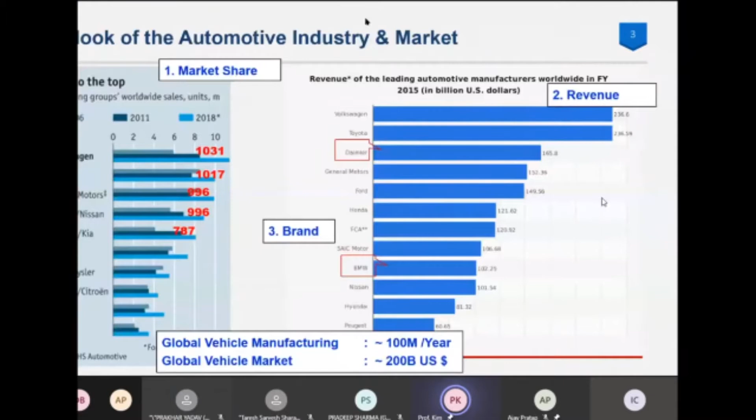This car, we can see, represents another category of the automotive industry: brand. Why are these three different categories important? Currently, market share and revenue are very important in the current automotive industry. But in the future, if the market moves in another direction, there may be a big revolutionary change. We expect a big revolutionary change in the automotive industry and market.

I'll talk about this again later - the mega trend. I'll revisit this issue, and there are 5 mega trends in the automotive industry, showing the digital transformation of the industry. The first trend is electrified, and it's becoming autonomous, shared, connected, and also the system is yearly updated. Electrified means there is a revolutionary change in the energy system - from fuel to energy, most vehicles are now powered by electricity.

Electric vehicle will be the main trend. And autonomous means AI will be a key role. Then self-driving intelligent vehicles will be the future.

And shared means there will be a big change in ownership and mobility. Instead of purchasing a private vehicle and holding ownership, which is the current model, in the future, mobility as a service will be the major business in the automotive industry.

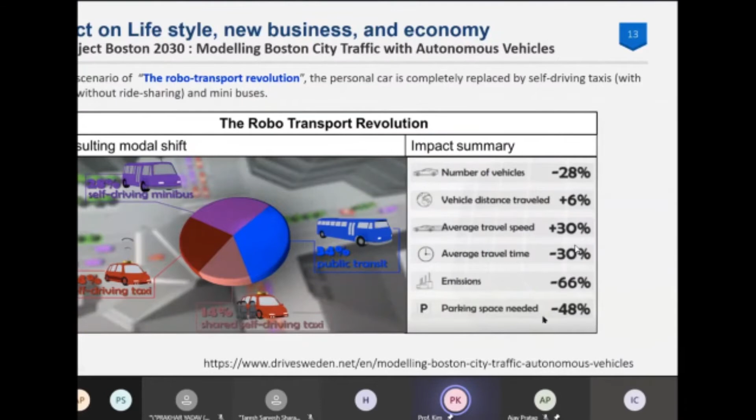Then I'd like to introduce the key AV technologies developed by the Yonsei Seamless Transportation Lab. I'd like to introduce five technologies that have been developed or are under development by the lab.

One is end-to-end steering control, the second is localization and mapping technology, the third is driving comfort of autonomous vehicles, the fourth is in-cabin monitoring, and the last is dynamic driving tasks and irregular situations.

It adapts differential GPS, LiDAR, and camera, using a LabVIEW system for the controller, and we use a PC, tracking a pre-planned path. This was a very early stage of autonomous vehicle development.

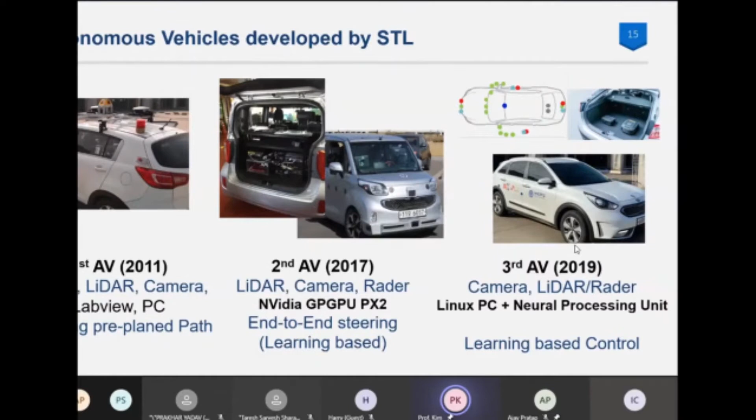In 2019, we got the license and developed the third autonomous vehicle using camera, LiDAR, and radar, replacing the NVIDIA Drive PX2 with a Linux PC and adapting a neural processing unit. We are developing a learning-based control system and a localization and mapping system for lateral and longitudinal controls.

I'd like to introduce end-to-end steering control, which is a deep neural network-based autonomous vehicle control system. The aim is to develop human-like driving.

Humans learn to drive and adapt to changing environments and situations, though sometimes we make mistakes. Usually there is a basic self-driving loop: sensing and perception, then a decision loop, then a control loop. We call it the self-driving loop, where based on perception there is decision and control, looping like this.

But actually human driving is a little bit different from this. With your eyes you can see, and we never calculate the curvature of each lane or path. We just learn—we become experienced, so at this speed, in this curvature, we know how the driver can control the steering. This is learning based.

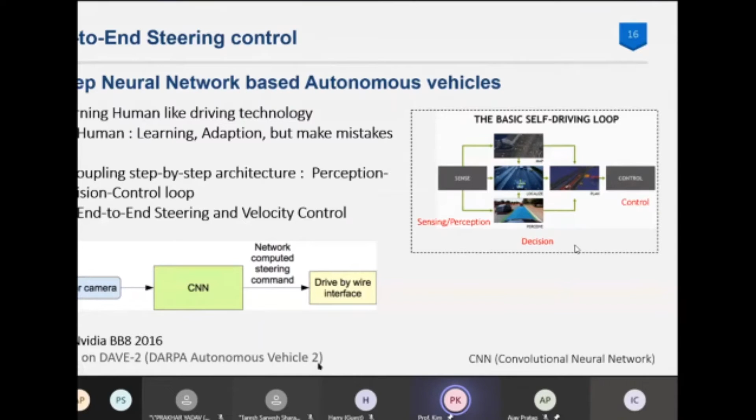The first autonomous vehicle adopted the DAVE architecture: there is a front camera, then a text image, then the DAVE neural network. We slightly modified DAVE and named it DAVE-2SKY, with actual control through a drive-by-wire system.

The basic architecture is very simple: camera, then the neural network, and then direct control through the CAN network of the vehicle.

For training this kind of system, in the pre-training phase we apply supervised learning using simulation. PreScan is a very well-known vehicle simulator, and we record steering angles and match them to the video input.

The camera records the image, and we record the steering angles. We train the DAVE2 network in this supervised way—there is an error that is back-propagated to the DAVE2 deep neural network.

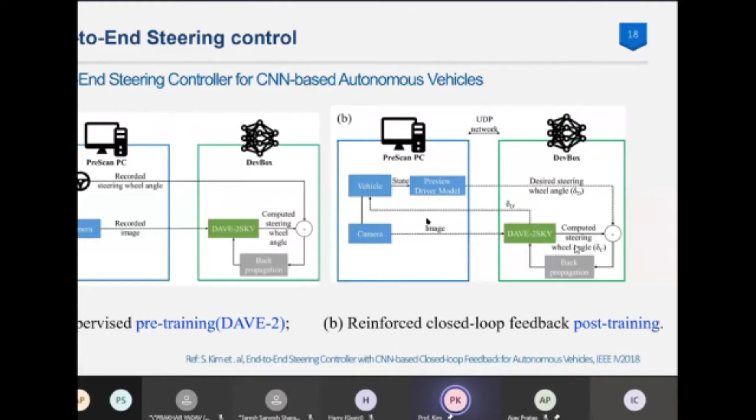There is the desired steering angle from the driver preview model, and back-propagation for training the drive network. There's also feedback to the vehicle, changing the vehicle state and training the driver's preview model.

Let's look at the simulation environment and test environment. The details of the experimental results will be shown by Dr. Mishra after this lecture.

Here is the simulation environment. During training, the vehicle moves counterclockwise, but in the test drive, the vehicle moves in the opposite direction. That's why, using the same route, we can still provide a different environment for the vehicle during training versus during testing.

Let's look at the result. This is the pre-training only result using DAVE, and this is DAVE-2SKY with our reinforced second training. Facing a very steep curve, the pre-training version departs the lane, but DAVE-2SKY still keeps the lane very well.

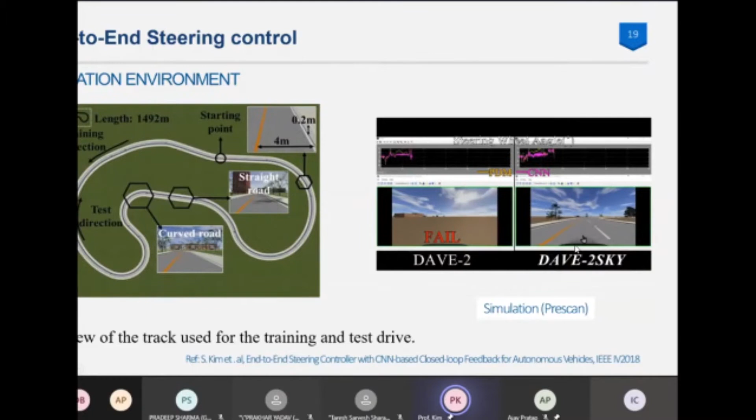Let's look at the difference in the steering angle. The green line is pre-training only, and the red line is ground truth from the expert human driver.

The blue line is with post-training applied. The post-training follows the ground truth very well through the curves. With only pre-training, the vehicle departs the lane, but with post-training, the vehicle still follows the ground truth very well. This shows the error between ground truth and post-training—at this point you can find the error is bigger.

Then the vehicle departs the lane in the previous case, where only pre-training is applied.

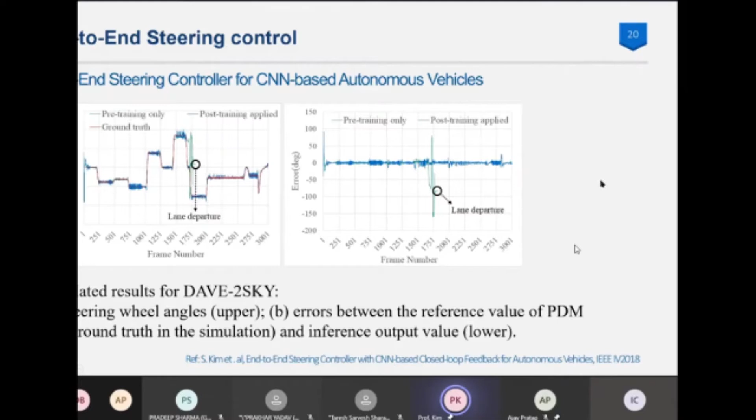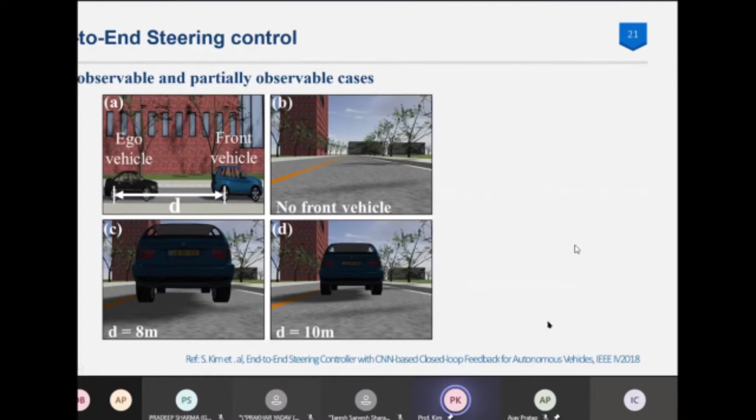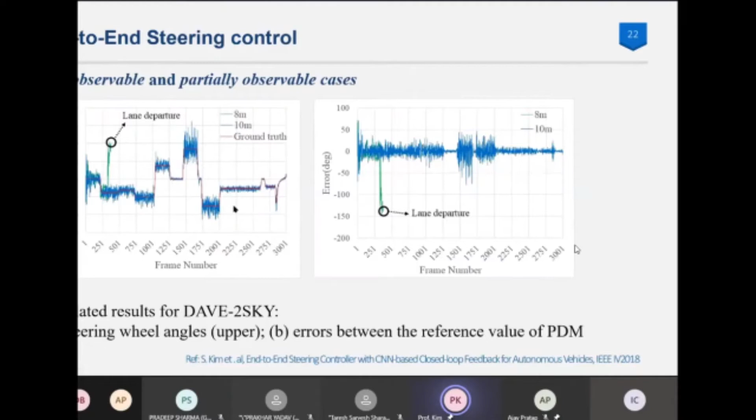This shows the simulation result for 8 meters versus 10 meter distance, compared to ground truth. At only 8 meters distance, the lane departs from ground truth after about 300 to 400 frames. But for the 10 meter difference, it can follow the ground truth steering control values. This means even when some part of the lane information is invisible due to obstruction by the front vehicle, if there's a margin of 10 meters distance, this kind of end-to-end steering control can work properly for autonomous vehicle steering control.

Let's look at the second issue: dynamic localization using vision and map matching. Our concept is for human-like navigation for autonomous vehicles. When you want to go to your destination, currently you press or call your destination point, then from the starting point there will be planning of a route, and the navigator guides you on how to arrive at your destination. Our approach is very similar to this.

Our approach enables autonomous vehicles to dynamically localize their position without very accurate DGPS. Instead of DGPS, we use visual map matching, like a human driver - we only see the environment with our eyes, then we know where we are, the vehicle's position and heading. We call this visual map matching, and then we can control by end-to-end control. So we have end-to-end control, and the second thing for human-like autonomous driving is we need visual map matching.

For this purpose we develop this kind of network for tracking position and heading angle on high definition maps. This is the map - the red dot is the current position on the map, and the angle is the heading of the vehicle. This is the camera, and from the camera input we extract lane recognition and segmentation using a CNN network. One part is for visual understanding, the other is for matching the visual information to the map. This allows us to accurately position the vehicle's current position and heading angle.

This is for the multi-lane case, for real-time tracking. This red one is the position by GPS. GPS has about 10 to 15 meters of error - that's why GPS only guides the rough location of the vehicle, with about 15 meter error. Based on that, we roughly estimate the position of the vehicle, and then through visual map matching, we adjust the location and heading angle.

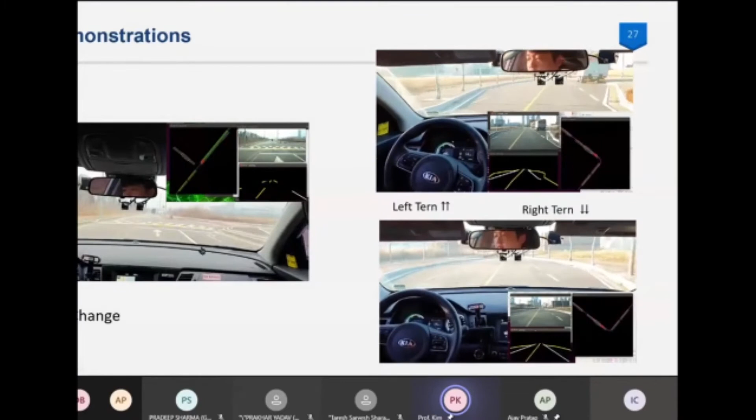The next issue is driving comfort of the autonomous vehicle. I hope you have some basic knowledge of lateral and longitudinal acceleration.

The x-axis is for lateral acceleration, and this is for longitudinal acceleration. Longitudinal acceleration is what happens when you drive the vehicle and it's accelerating or braking. Plus longitudinal acceleration means acceleration, and minus acceleration means...

braking. For a younger, aggressive driver enjoying aggressive driving, it's for quick acceleration and enjoying sudden stops. Therefore younger guys usually like sports cars, preferring a big plus longitudinal acceleration and minus longitudinal acceleration.

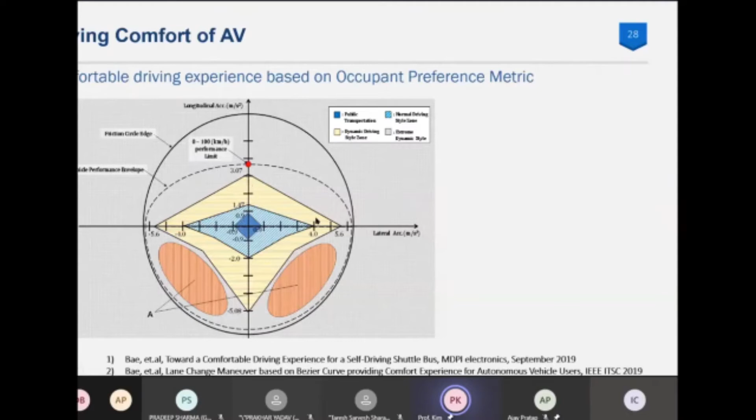The passenger in the vehicle is only an occupant. But when he or she is driving their vehicle, they have a preference metric. You can mark the preference metric in some area of this matrix.

Based on the occupant preference metric, the occupant selects a preference metric. Based on the preference selected, we can optimize the motion planning and control, the lateral and longitudinal control, based on the criterion of lateral and longitudinal acceleration.

Then we get the vehicle status from the sensor. Based on this criterion, we control the motions. Like this is a kind of autonomous vehicle route.

This is the preference metric. Here is an experiment on real road test. We are making this kind of real road test.

This trajectory has steep corners. We make a right turn at each corner. Then we are selecting the occupant preference metric like this criterion.

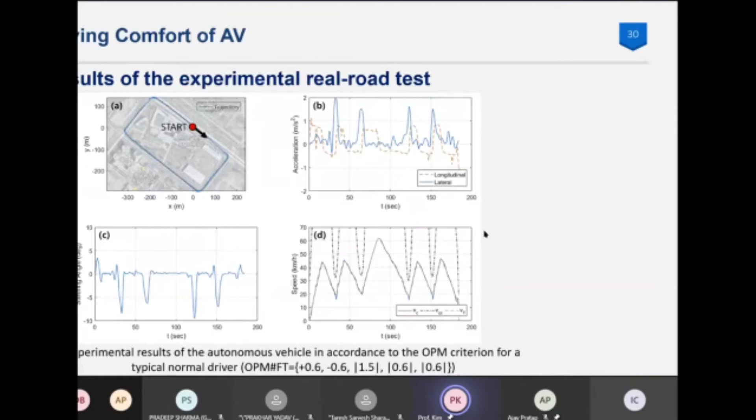The next topic is the dynamic driving task. What is a dynamic driving task? When the driver is driving the vehicle, the driver is actually...

detecting the object and event and responding. During driving, we call this the OEDR task - object and event detection and response. This OEDR process is called the dynamic driving task.

For doing this OEDR, if there is a pedestrian on the street, the driver must detect this pedestrian, and then decide whether to stop or bypass the pedestrian. This is the response of the driver.

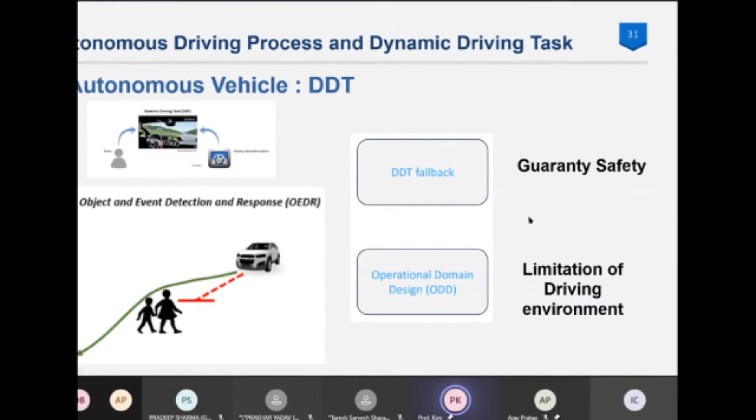But this is for normal situations. If the operating domain exceeds some limit of the driver's capability, we must do the fallback system for guaranteeing safety. Then let's look at more details of the dynamic driving task and the self-driving process.

In the driving task, we can classify the task into three functions: strategic function, tactical function, and operational function. The strategic function is for choosing the destination, and based on the destination we are planning, for example whether we take a highway or a local way, based on the toll fee or expected traffic jam. We choose the path for arriving at the destination.

This is for the strategic function. During the driving, we are sensing the environment and doing the OEDR, which is object and event detection and response. I explained this in the previous slide.

Then there is the operational domain, which we call the ODD. The ODD means the environment each driver can drive in. For example, most of you are Indian, and India has very warm weather. Can you drive on an icy road at 100 km/h? Can you drive your vehicle in snow at 100 km/h? I think you've never experienced this kind of snowy highway condition, so maybe it's out of your operational domain, out of your domain capability. That is the concept of the ODD.

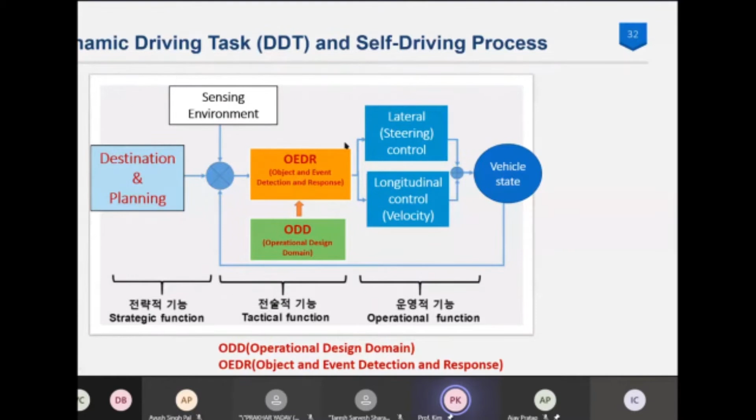Under the ODD, there is the OEDR, which is the tactical function - performing object and event detection and response. Based on the OEDR, we control lateral and longitudinal movement. As a consequence of this control, there is a change in vehicle state, and there is feedback. There is also sensing of the environment for rain, mapping, night, wind, or fog - we need to sense the environment. That is basically the dynamic driving task of the autonomous vehicle.

Then what is level 3 and level 4? It's back to the beginning of this lecture. For level 3, I told you that it's for self-driving.

Quickly back to the slide. I need to remind you of this one. Can there be something wrong with sharing? Okay, hello sir, hello sir, yeah okay okay. Now we share - okay, sharing the slide again.

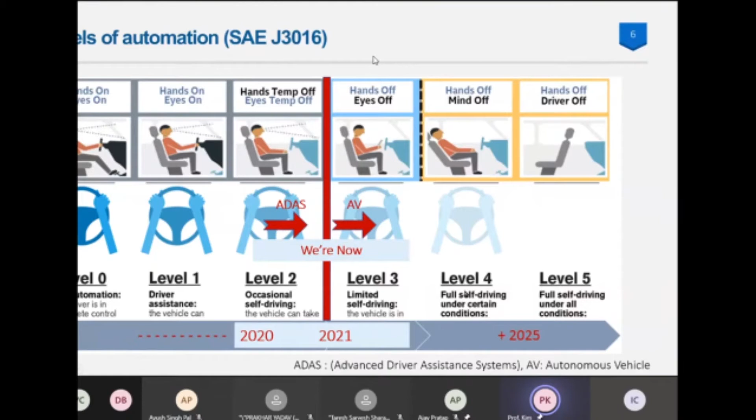Here, level 3 is a limited self-driving. It means it's self-drive, but even though it's a self-driving vehicle, there is not full self-driving - there is a limitation. Then I try to explain what is level 3, level 4, and level 5, and what is the difference. Level 3 has limited self-driving, Level 4 full self-driving only under certain conditions. Level 5 is full self-driving under all conditions. Then I'd like to explain the difference in the dynamic driving task for these vehicles.

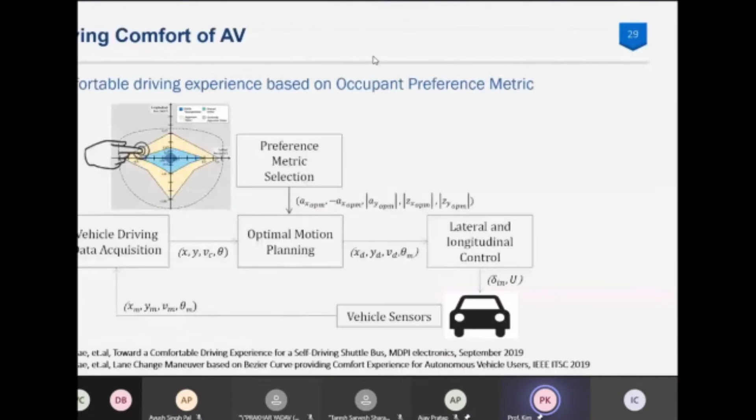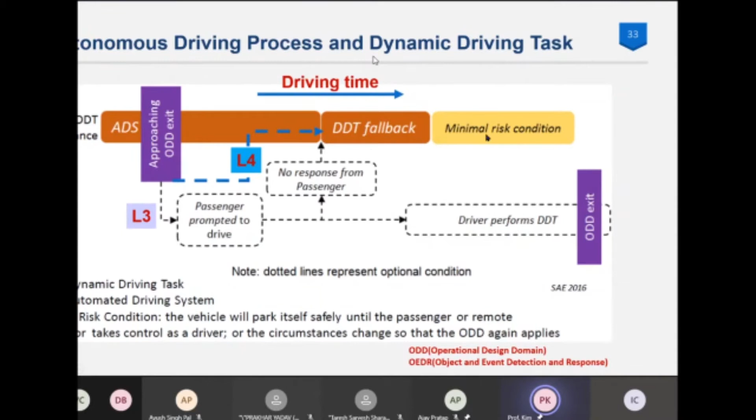For level 5 vehicles, there is no ODD exit condition - it's full self-driving, it must drive in all conditions, with no ODD exit environment. You can drive anywhere, any condition, anytime. That is the big difference between level 3 to level 5 autonomous vehicle stages. For artificial intelligence up to level 3 autonomous vehicles, you are usually very familiar with recognition and detection of the environment.

There's vision for detecting something, and for image segmentation. There's also an attention loop for understanding and predicting the environment. This kind of commodity deep neural net for artificial intelligence works for autonomous vehicles up to level 3. For vehicles above level 3, we need more intelligence.

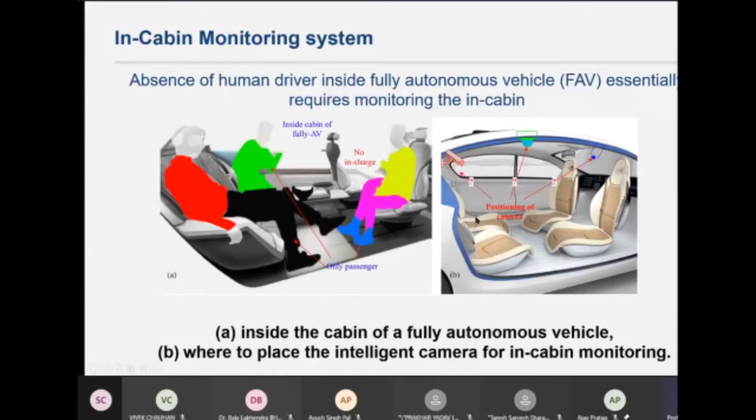The first thing is finding the proper or optimum position of the camera in this kind of fully autonomous vehicle. We might think about a front camera, but it only sees the front driver, not the back seat passengers fully. With a ceiling camera, we can capture the full inside image using a single camera.

Then we can detect objects that may cause safety issues, or other important obstacles, using detection of a knife, cigarette, luggage, or drinking. You can monitor all kinds of things with the ceiling camera.

But another important issue is privacy. If you monitor using a camera inside the cabin, the real face will be recorded, which will cause a violation of privacy issues. That's why we need technology for face anonymization.

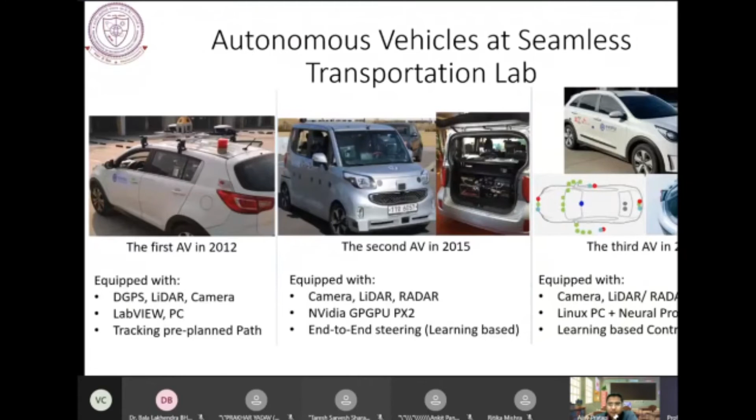In this video, as I already explained, we have 3 autonomous vehicles. This video is portraying the demonstration which was captured at one city, and the lap was around 2.4 kilometers, and the vehicle was capable of moving at 30 kilometers per hour speed. You can see here the descriptions, and the total area covered was 24 kilometers.

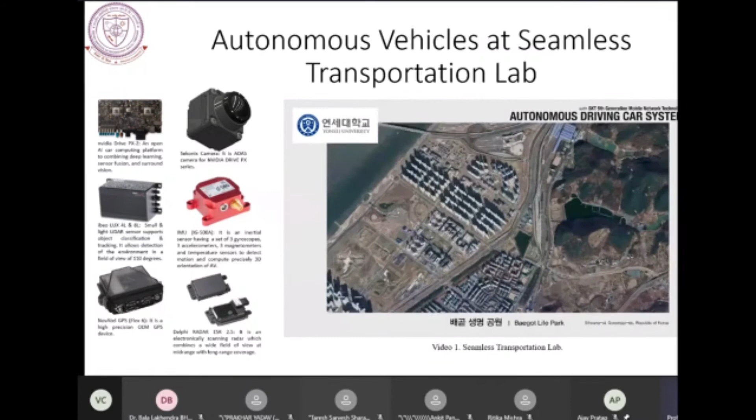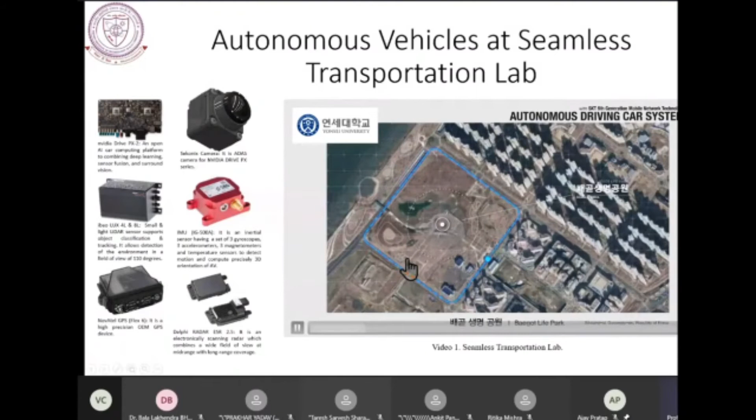So this is the lap. In your video screen you can see the lap covered, which is at Sejong city in Korea. It is around 2.4 kilometers, and total distance covered was around 24 kilometers. And this was the vehicle, which is equipped with the different sensors we have just talked about.

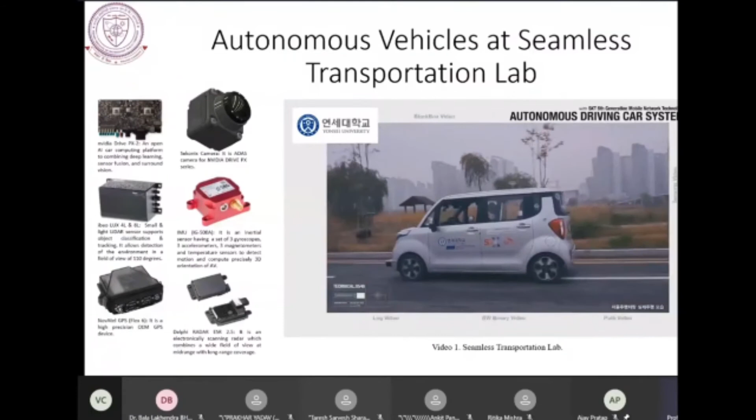So this is the real-time video captured on that same lap. This shows the video from another vehicle, and this is the main autonomous vehicle. Later we will see the black box video captured through the vehicle. This is the original video frames we are capturing. These are the logs, and here we can see one window for black and white binary video.

This is the path we are going on, because here in Korea it is the right driving track. This is the screen where we can see and sense the coming vehicles and obstacles, etc. So as we can see, we are moving, and there is one bus coming, so we can see in that video it will be detected.

You can see it stops. So here we can see the bus is there, which is captured with the bounding boxes. And this is the captured green bus and other vehicles we can see. Again there is a green box.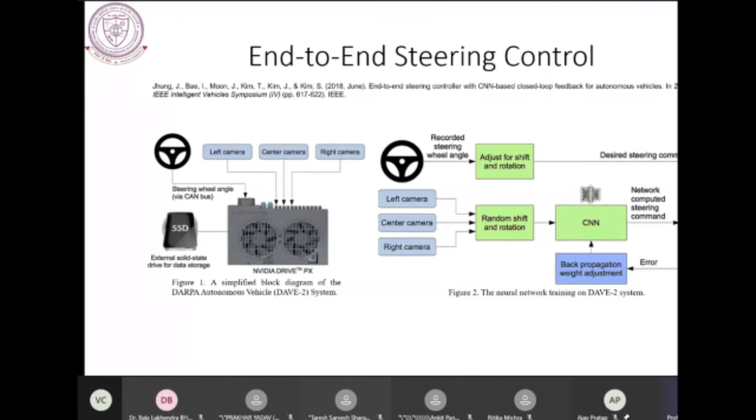And this is the basic concept of our DAVE-2 system, which was from NVIDIA, but we have proposed DAVE-2SKY with two training phases: pre-training and post-training. Post-training is the reinforced training.

The pre-training was actually from PreScan, which is a simulator that only simulates virtual scenario situations, but we have adopted the PreScan model and retrained that model with our own network.

That network was this: it has 5 convolution layers, as we can see - convolution layer 1, 2, 3, 4 and 5 - and it has 3 normalization layers, batch normalization, and then 2 fully connected flat layers. Finally at the output we are able to predict the steering wheel angle.

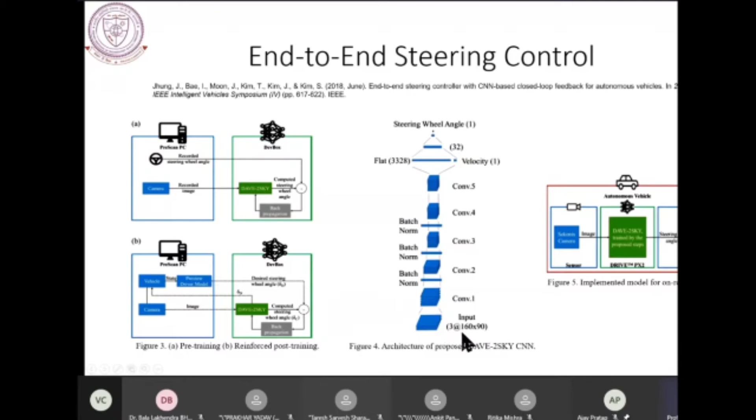So the whole system works like this: there will be the visual sensor through which we will capture the video images and real-time frames, then our DAVE-2SKY model will predict the value of the steering angle, and accordingly the vehicle can move, as we have seen in our previous demonstration. We have captured the input at a frame size of 160 by 90 in RGB.

So this is the track we have chosen for testing and training. As the professor already told you, the training direction was counterclockwise and testing was clockwise. This was just to preserve that the training and testing inputs are totally different, not the same for the model, so we can avoid any kind of overfitting or cramming situations.

And we have different scenarios chosen in our lab, like curved road and straight road kinds of scenarios, and this lab is actually at Yonsei University.

So we can see the scenario is like there will be the ego vehicle, which is the autonomous vehicle on which we have implemented this DAVE-2SKY system, and there will be some front vehicle. So there might be two scenarios: in the front there is no vehicle, as we can see in figure B.

And if there is a vehicle, what is the minimum distance through which we can estimate the exact angle? We have chosen the minimum distance at 8 meters and 10 meters, and we will see the results in future slides.

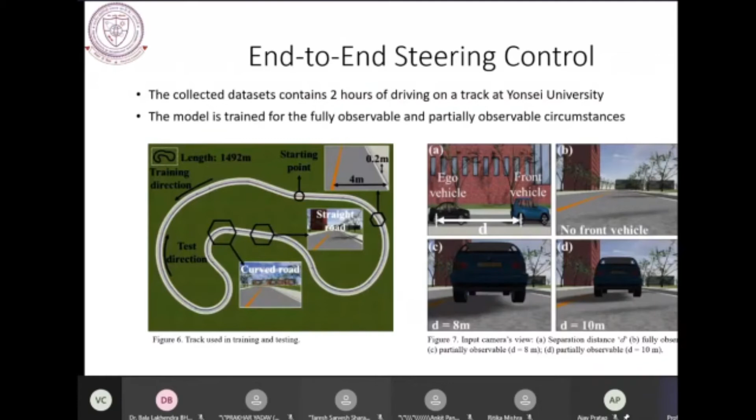So basically there are two kinds of scenarios: the fully observable scenario and the partially observable scenario. These are the experimental routes we have seen, and these are the results.

So we can see that the pre-training model, that is from the PreScan, had problems when there was a sharp turn or something - it took a lane departure if there was a sharp turn, so it was not able to predict the steering angle at sharp turns. But the post-training model crisply identified the steering wheel angle and followed the track.

So, for both fully observable and partially observable scenarios: for fully observable, pre-training and post-training were applied. The pre-trained model showed lane departure after a few frames, but the post-trained model followed the same track correctly. In the partially observable case, at 8 meters there was some lane departure, but at 10 meters we easily went through in both cases.

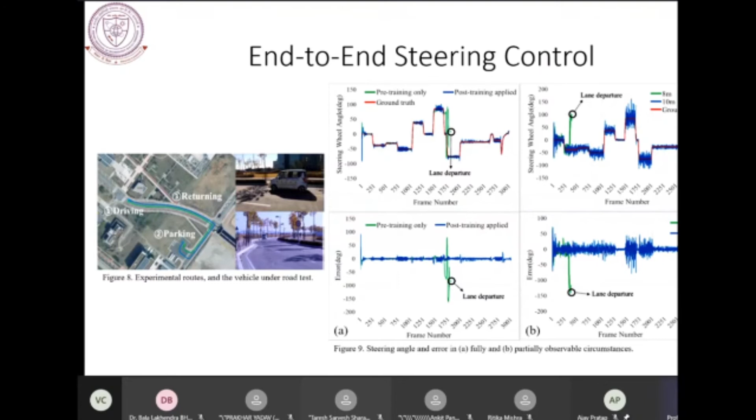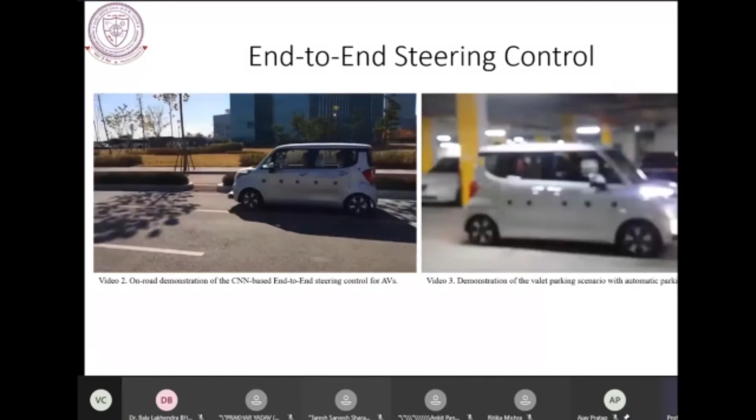In this way we developed our own end-to-end steering control, which was able to follow the exact steering wheel angle. These are the videos showing the track we followed, inside the Yonsei campus.

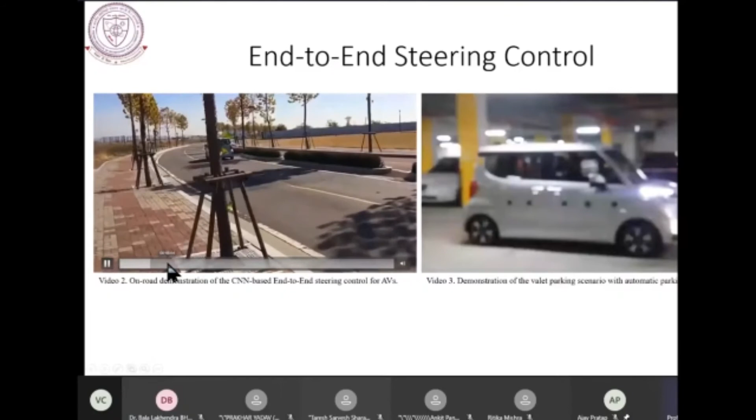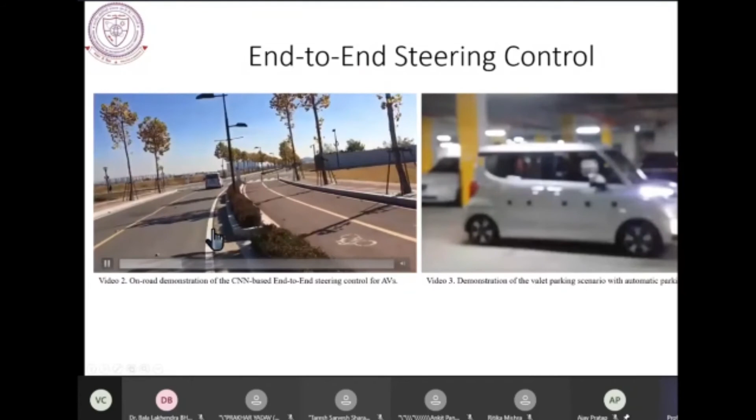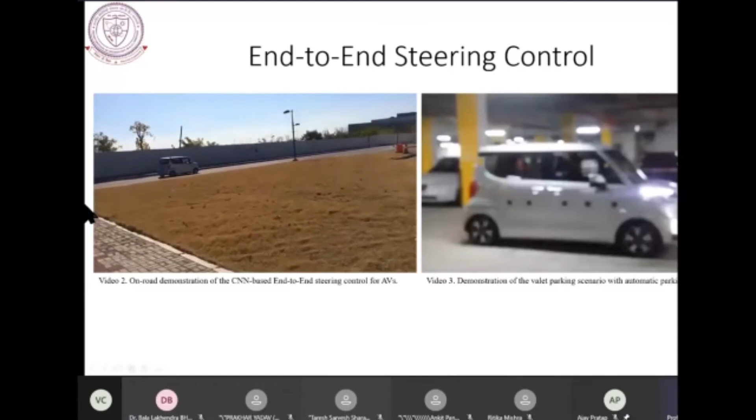See, the vehicle has good steering wheel prediction, so it turns. Now there is the parking place where the vehicle will again take the turn and safely park.

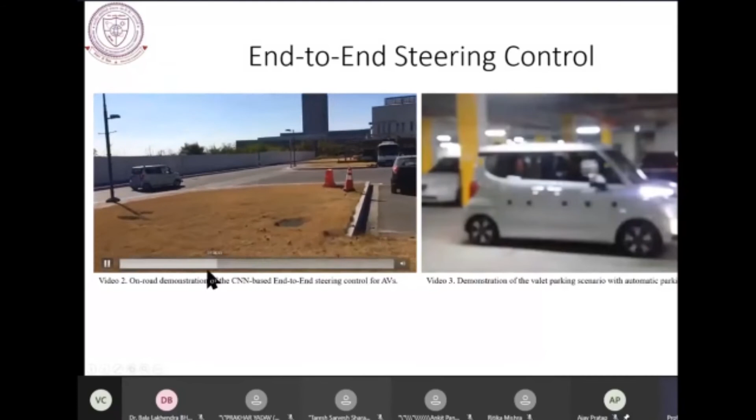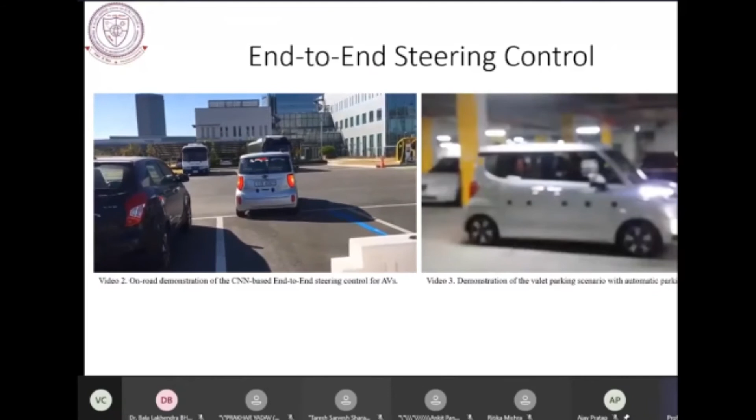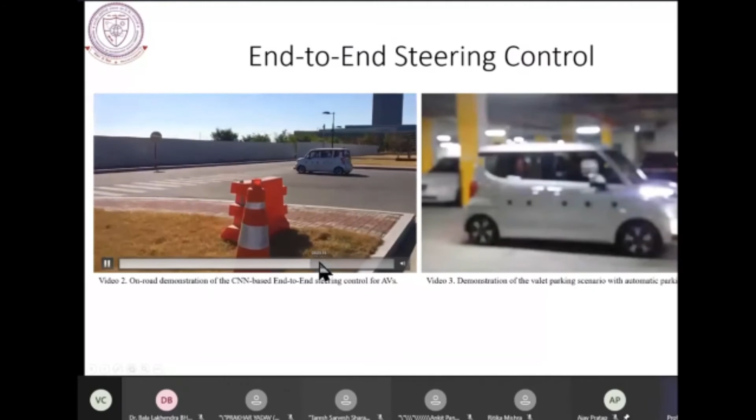This is the position of parking where the vehicle will park itself. This is the parking position, and then it will retrace the lap after a few times.

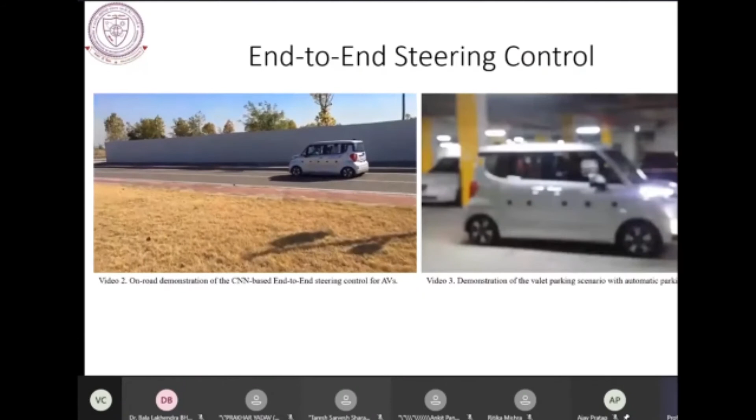Through this demonstration we have seen the vehicle was able to predict the steering control at sharp turns as well, and it was able to park itself at the desired location.

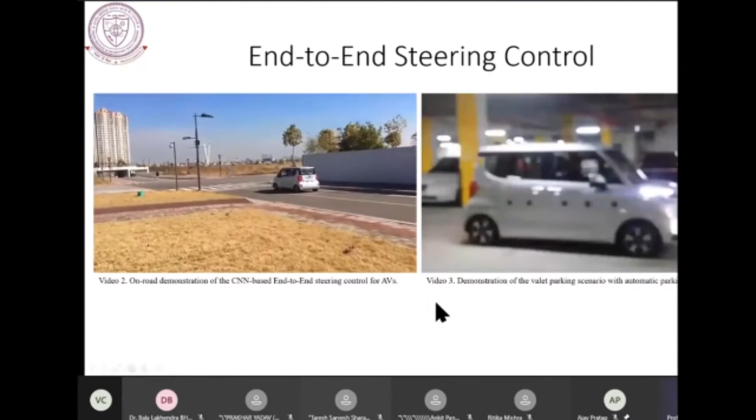Again it turns, and retraces the path.

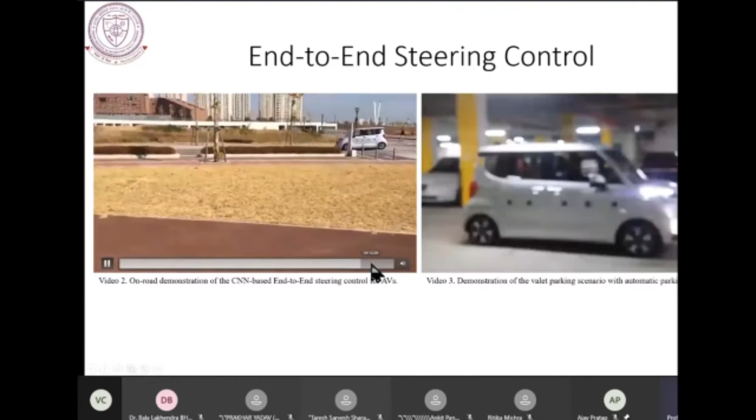In the next video, we can see the valet parking at the underground level.

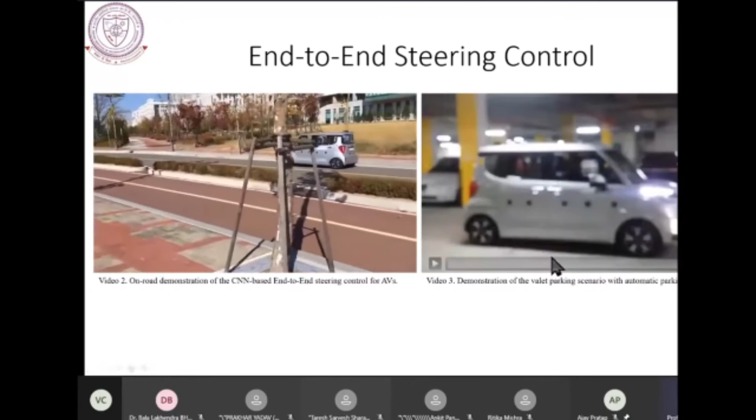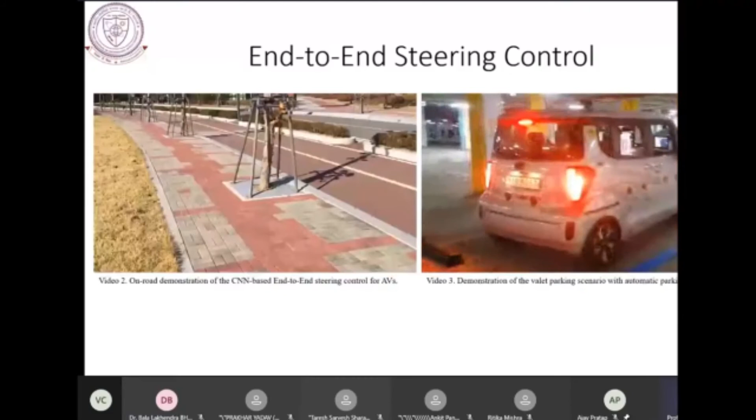So it is the automatic parking scenario. See, safely the vehicle was able to park itself at the underground basement.

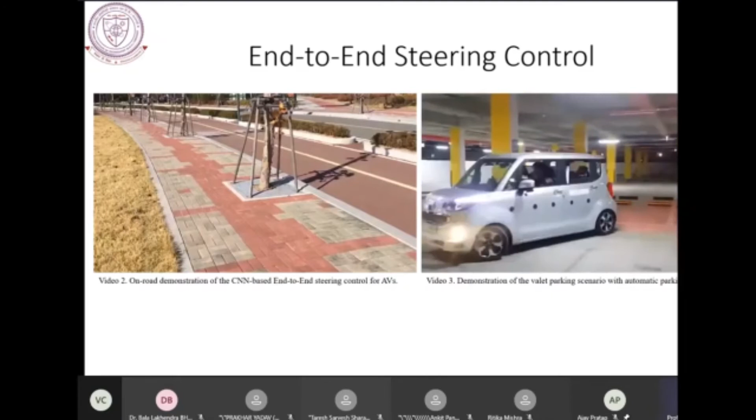There is a sharp turn and lane departure. The vehicle in the pre-trained model failed to take the turn, but in our own trained model in the simulated environment, the vehicle was able to safely make the decision. So in both the real scenario and the simulated domain, the model was able to predict the steering wheel angle correctly.

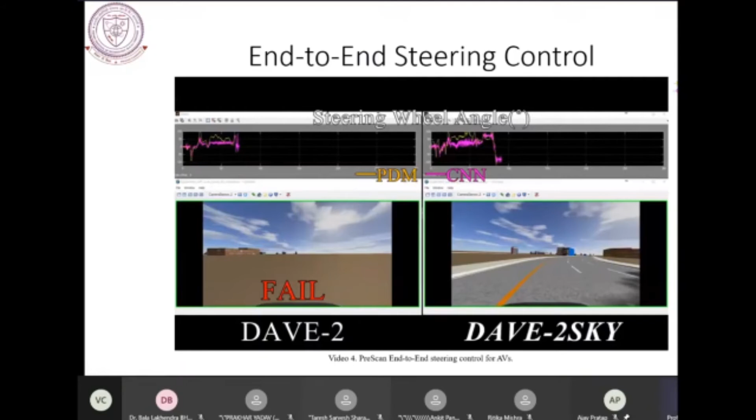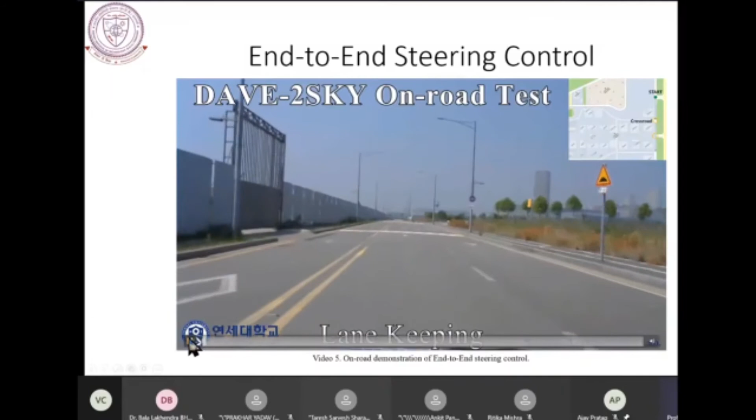And again, there is a test. The previous video was at lesser speed, and this video will show the faster speed. This is the map of the lab.

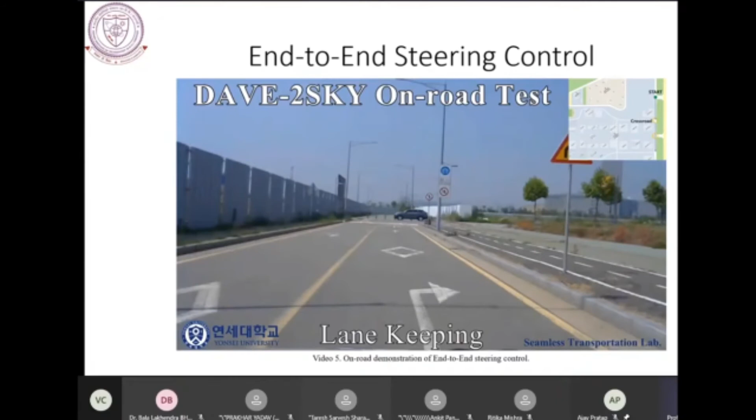You can see at the bump, the vehicle has some jerk. See, there is a turn, so it takes the right turn safely.

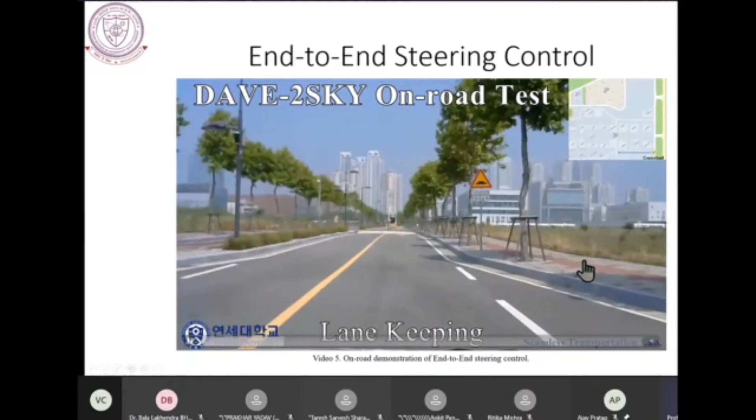Then it maintains the lane. Yeah, there is a left turn, so it took the left turn safely and then maintained the lane.

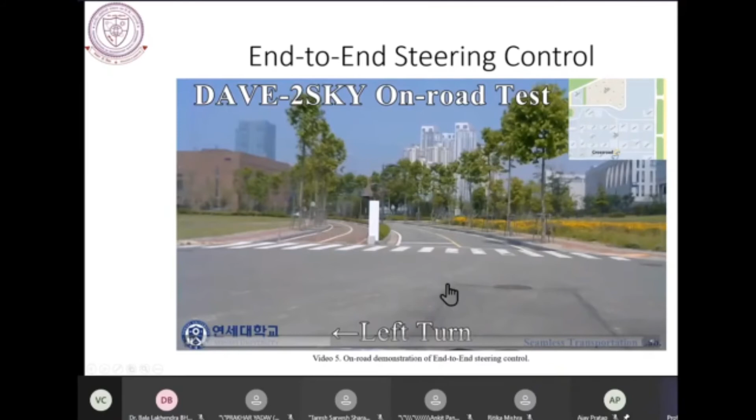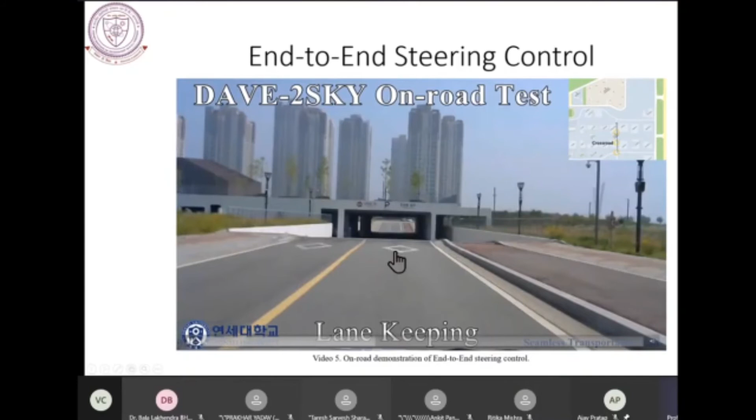Again, it was just because U-turn was not trained in our model, so it was a manually taken turn. And then the vehicle is passing through the underground, able to follow the lane safely.

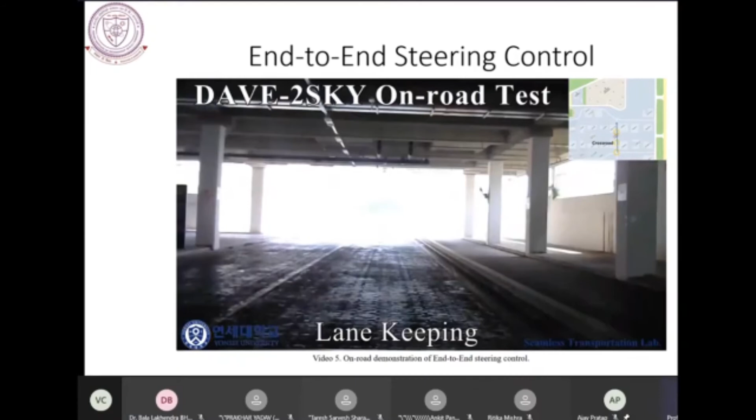So as I told, we have developed the end-to-end steering control for the autonomous vehicle and demonstrated the same for the simulated environment as well as the real environment.

Now in the second demonstration, we will go with the Smart Mobility Expo, for conference, exhibition and experience, themed freedom for mobility, with different participants from the globe. The expo was mainly for autonomous driving, for ground vehicles, urban air mobility, and personal vehicles, related to autonomous bus shuttles, drone taxis, personal vehicles, and it had a delivery bot as well.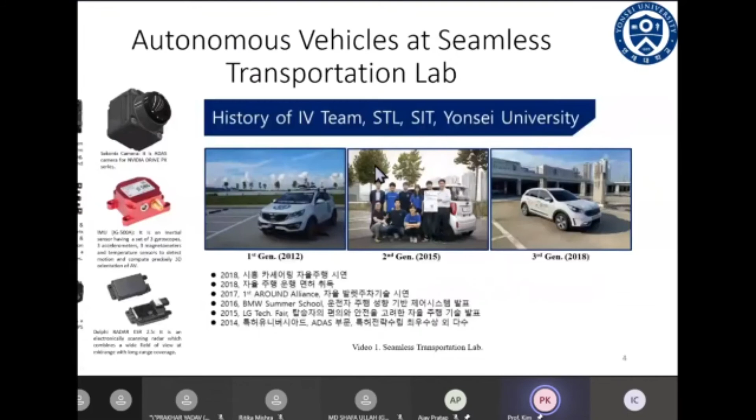So the next example of our research was for the smartphone based car sharing service in autonomous vehicles. We have implemented a very good concept, which is the What Three Words concept. I will explain in a future slide. It is actually to provide the precise location of the location information.

So the requested taxi will come to that place, but at the app view of the driver, it asks the user where they are asking for me to come, is it able to stop there, because we know that we cannot stop right now at any place.

So if it will search for the location, if the location which is asked by the user is available for stopping, then it will go. Otherwise it will ask for the new location. Then the user has to search the new location where the vehicle can stop.

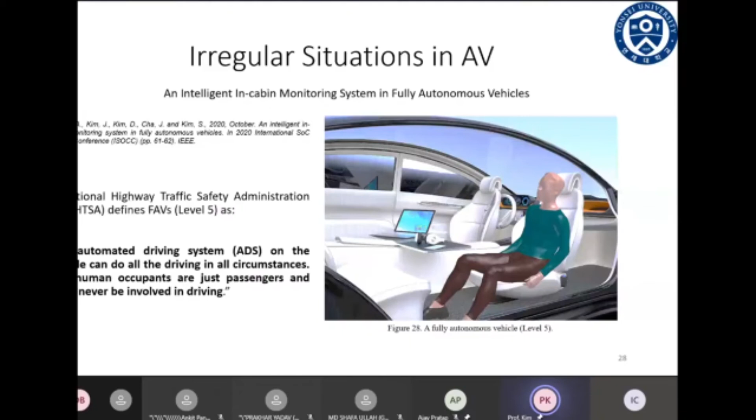As the NHTSA, the National Highway Traffic Safety Administration, says, level 5 is a vehicle which can perform the automated driving task, and the passengers will be only the occupants. They will not contribute themselves as the driver.

So the problem is that there will be no driver, no one in charge, only every passenger will be an occupant. So who will take care of security and safety? Because security and safety is the main issue in that case. And security is related to the vehicle itself, because the passenger can wear and tear the vehicle and cause some harm to it, and also security to the passenger itself, because as the professor said, there will be privacy issues and other things, which we will go into detail in future slides.

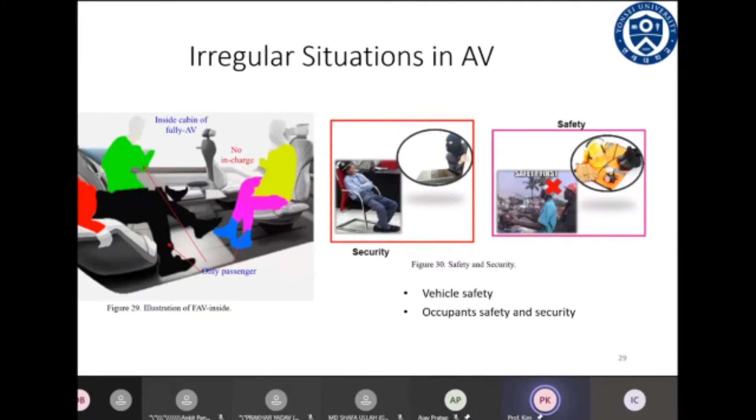And for safety, it is related to the fact that somebody may have a hand or head outside the vehicle, so there is no one in charge to take care of that. So we have considered all these things. Mainly we will have security and safety related to the occupant, and safety related to the vehicle.

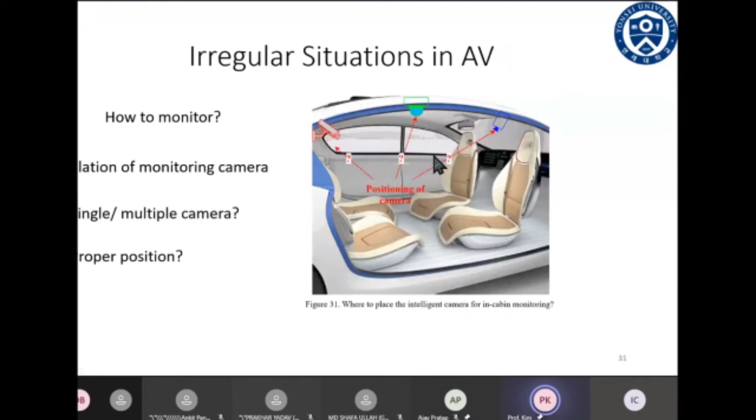As already discussed, the first question is where should we place the camera? What should be the proper positioning? Should we place it here, there, or at the center? The best choice will be a single shot image at the center, because here we can see the entire vehicle in a single shot, but it has future bottlenecks we will see. So we train our model depending upon this single shot image, and it will be the best position for the AI camera, then use the inference of this trained model for the real-time scenario.

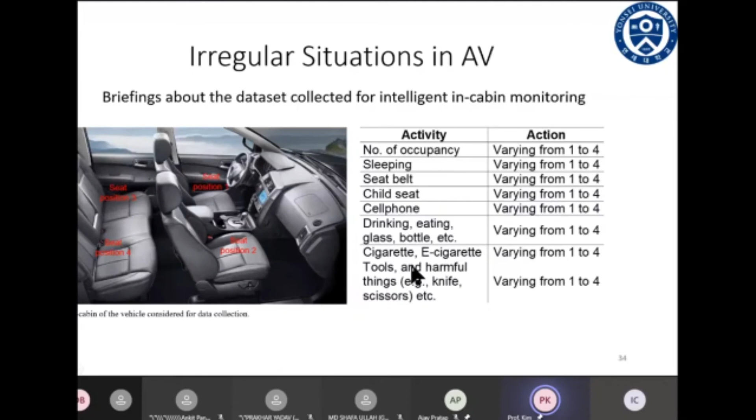The dataset we collected was based on these scenarios: there are 4 positions in our cabin, and we captured different activities like occupancy varying from 1 to 4, seated, sleeping, seat belt, child seat, cell phone, drinking, eating, glass bottle, cigarette, e-cigarette, tools and harmful things inside the cabin. These are a few glimpses of the data we captured: occupants with luggage, drinking inside the cabin, or having harmful tools or a knife.

There are scenarios related to cigarette smoking and other things. As we said, there is no one in charge to take care of that, which is why we require intelligent in-cabin monitoring. So I will show you.